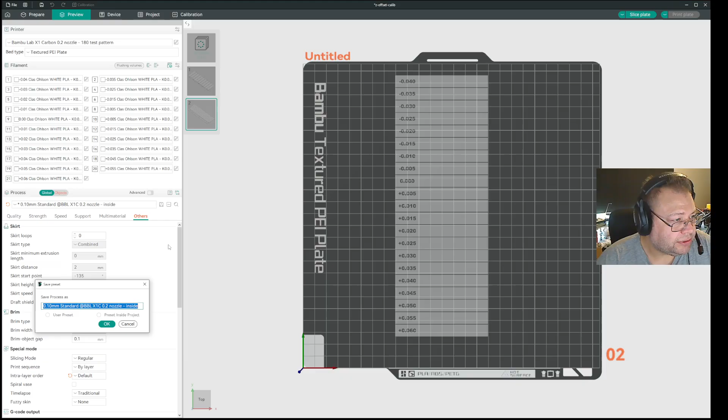So at the bottom of your Orca Slicer you can see the print sequence on the first layer, because in the global settings, others, it is set to by layer, not by object, because if you set it to by object you cannot fit all this in one plate. So set this to by layer, because you want to print all of them in the same layer first.

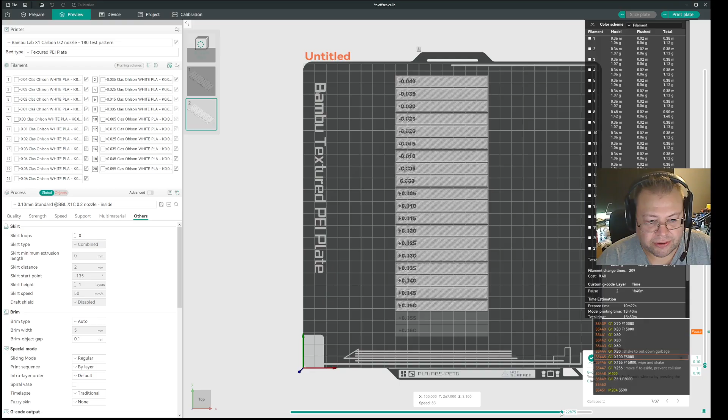Okay, and then you go to slice it, and you will see the sequence that you have. Okay, and at the bottom here, as I said, you have a bar you probably haven't used so much, but this one basically shows how it draws all the objects in sequence.

So it starts with 0, and then you can see, if I tilt this sideways, you will actually see an impression of a print head that prints it, and then you can see it starts to print downwards. So this is basically the sequence that it's printing in currently. But as you can see at the start there, it didn't start with the top. So I'm going to show you how to do that. Okay.

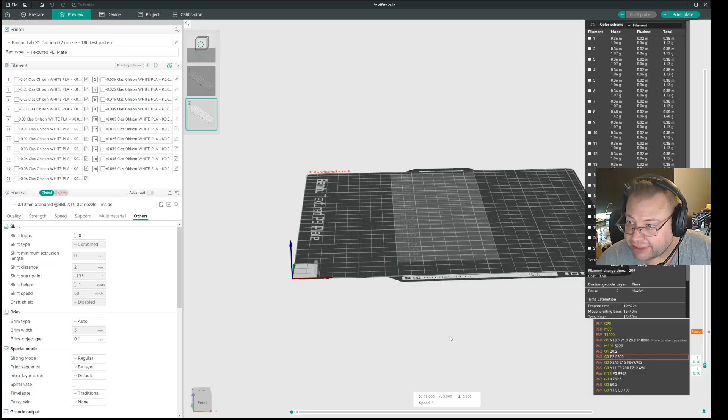By default now, every one of these also has the same order that I have put these in here. So all the filaments here, filament 1, filament 2, filament 3, filament 4, filament 5, filament 6, that equals the order I want to print with. Now that may not be the case for you. That is why you have to change the order. Okay. So first step, select all the filaments you need.

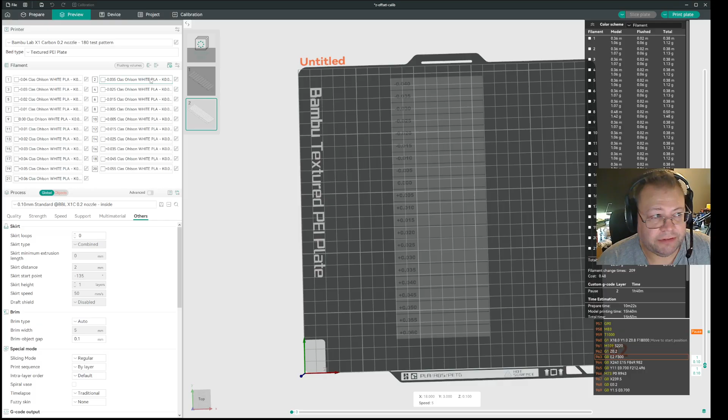And if you want to control the order sort of partially, make sure those filaments are selected in order in this list. That's what I have done here. If it's not in order in that list, you have to manually put it in order later. I'll show you how.

Okay, so let's say you did that like me. You put all these in an order. But even though this 005 is in order in my list, it is listed as number 8 here. It prints first. I don't want that. So I want to put that first, okay? So you start by going to the global menu down here to others.

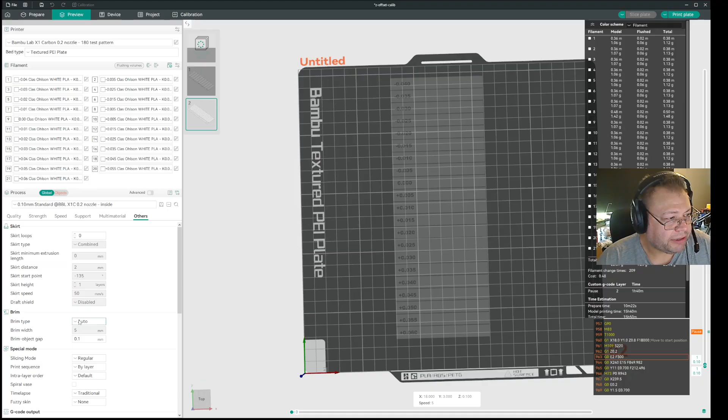And in my case, I don't want brim. No brim. And then forget that. But you go in the others and then you go down to special mode. This is Orca Slicer, remember. It could be different in Studio. And then you go to by layer. You leave that there because you want to print by layer to have all the objects in one setting.

But you have in Orca Slicer something called intra-layer order. And if you hold your mouse over, it says print order within a single layer. Okay? And when you click this, you have as object list. Now you would think that you can go into object here and select the different order here. But that doesn't matter. That's not what it does. So basically you go in global and you select as object list.

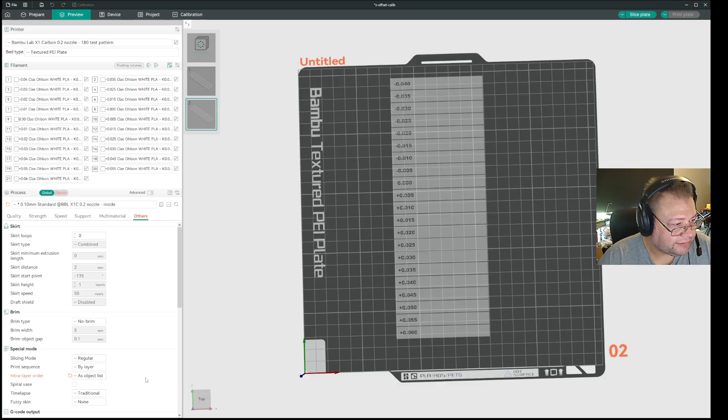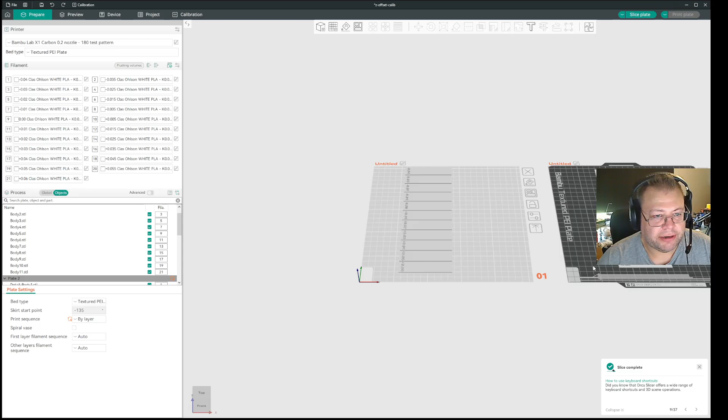And then you leave that as object list. And then you click on objects. And you select the build plate. I have 2 build plates in my overview here. I have one there and I have one there. I'm going to change this one. And then you go down and you select, okay, I want to click on build plate 2 because I want these settings to count for the whole build plate.

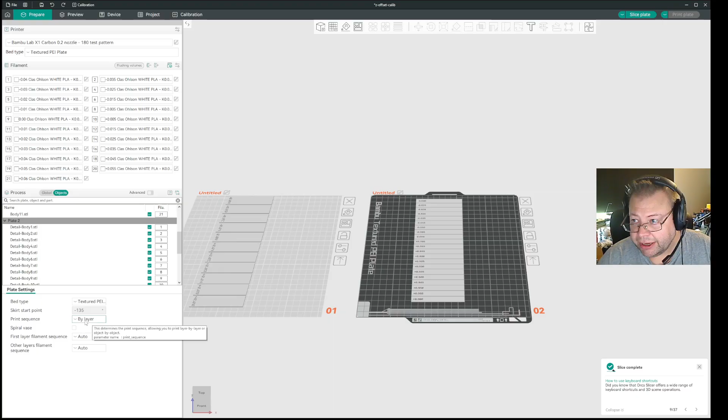Okay. So select the build plate. Not an object, select the build plate. Then under build plate it will show by layer. Okay, make sure that is correct for that build plate. And then under here you have something called first layer filament sequence, and it is automatically set to auto by default. So click that one and select customize.

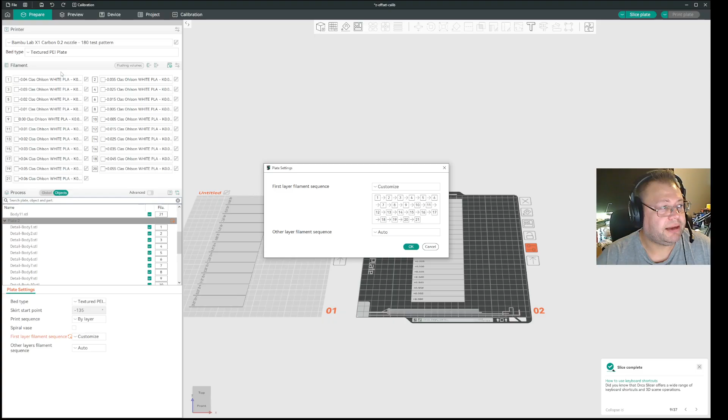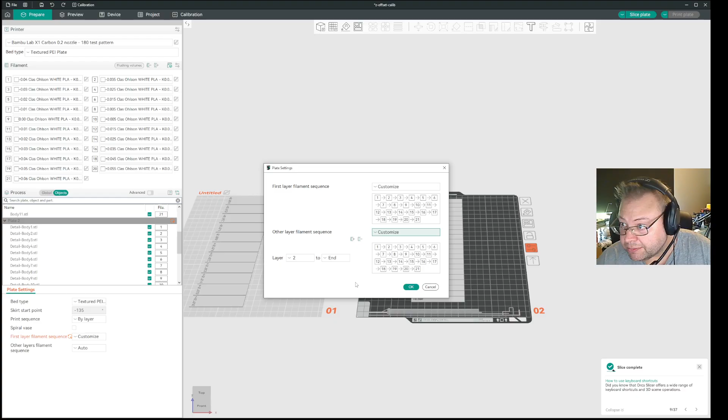Now on my screen, you can actually see that it keeps the same order of print that shows here. Okay, and the first part here is for the very first layer. The second part here is for every other layer. So you can go and you can select customize for that too, or you can select it down here. But if you select customize here as well, which I recommend, always print the same layer at the same thingy, then you can see that it gives another list here.

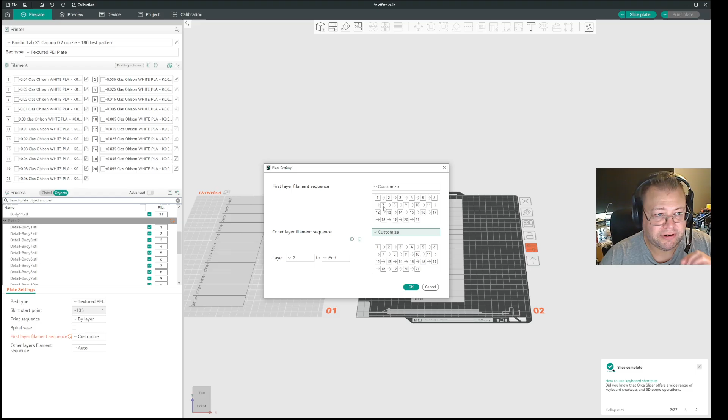Now here comes the fun part. If I select OK now, it will have fixed my problem with the one that didn't print correctly, because now it will be forced to print filament 1, filament 2, filament 3, filament 4, filament 5, 6, 7, 8, and so on. Okay? Which means that it will be forced to print first this, then this, then this, then this, instead of printing this first and then start on the top. Okay?

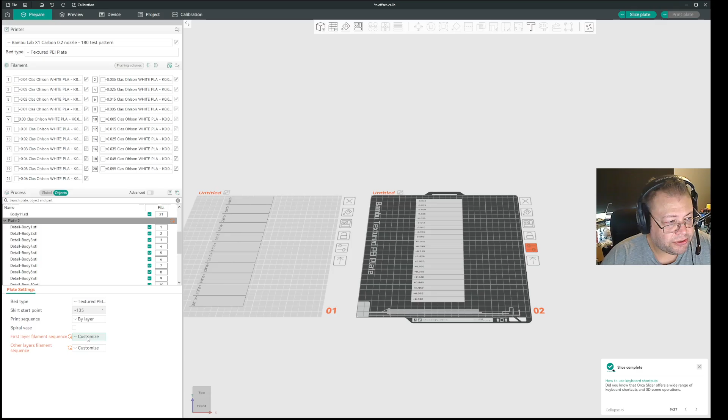You can change that order. Let me first show you that now. You bring it in, and it says customized here at the side now, and then you slice it again. And you will see that when I now bring this to the bottom and I start to scroll it, it will start from the top. So for me, that is the correct order I want it to print as. Okay? And then you get to the end.

But let's say you want to decide yourself which order you want to have. So you click here and select customize again. That brings up the window.

And then let's say I want to print that one first. And then I want to print this one. You left click, you hold and you drag. And then you want to print this one there. And number 18 I want as number 6. So for the first layer now it is selecting that order, and then I press OK.

Then you slice it. Very important. You have to sort of save it by slicing it. Now I have sliced it again. You already probably could see it. So now it's following the order I decided that it should print by the first layer. And then it continues with the original as it had it. You understand that?

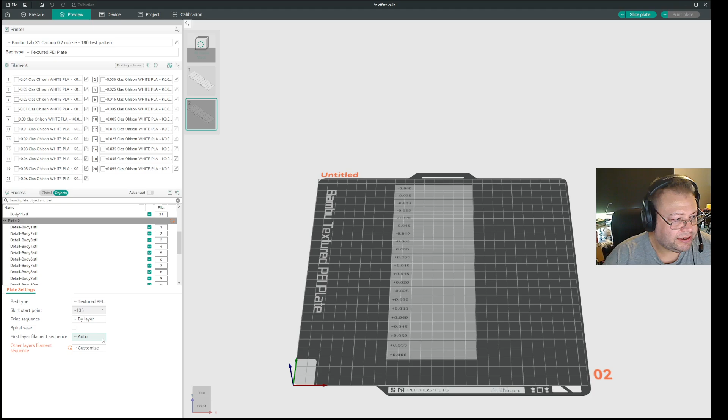I once saw a guide that said, oh, you can delete them in order and then bring them back in order. That's not how you do it. This gives you more control and is very, very detailed on how you do it. So how can I get back everything I did before? Select auto, go to customize, and the one I set before here has reverted back to its original setting, because it always takes the default order of filaments you have here and suggests that as your default order.

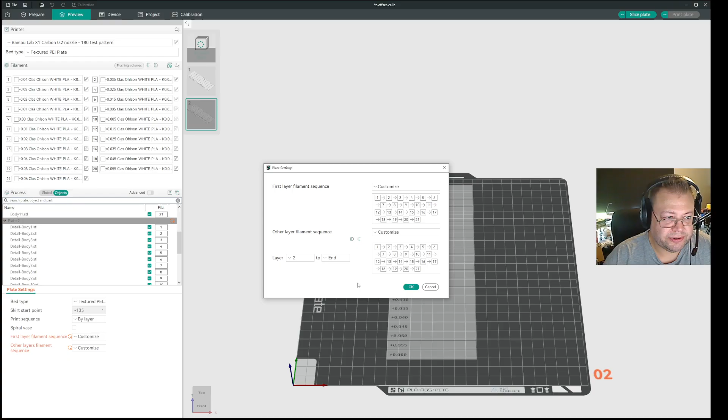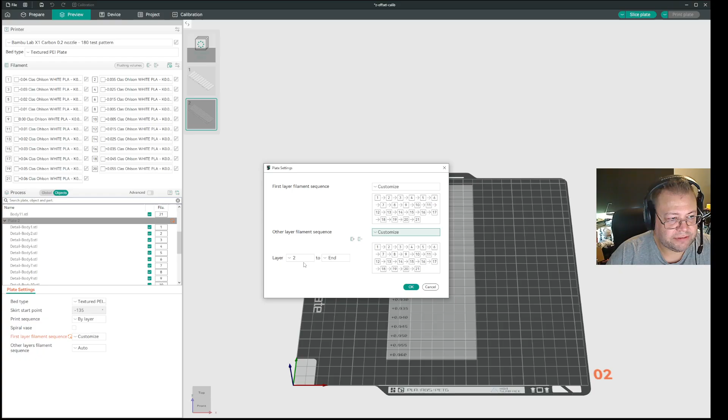So for me now, you can actually say here, oh, I want to start by layer customize, layer 5 for instance. From layer 5 I want to print like this. And yes, so I go back to auto, and then I select OK, customize, and by default now this has the correct order and this has now the correct order, because from layer 2 and onwards I wanted to print like that as well. Slice it.

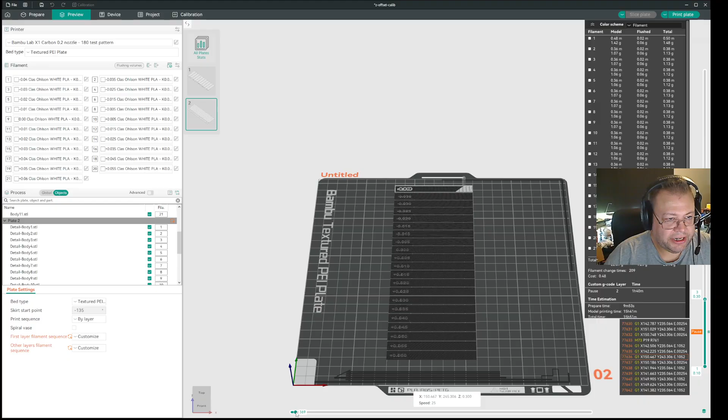And then you can see that I now have the exact order in which I want to print this. And for all the other layers, I'm just jumping over layer 2 because I have a pause there. For all the other layers, it will show exactly the same order.

So I hope that showed you really well how you can change the order of how to print each object on your build plate. Now there may be a problem here. If you're printing as parts, that's when you have a list of parts listed under one object. So you can import as object and split the part, and then you will get one main object, and then you have a lot of sub objects under it.

I haven't tested how it will be to print like that, but you can test yourself. May work, may not. For me, print by object is the way to go on this. And it also lets me go in and say, okay, I don't want to run these because I know they will not print. So I can just go in, and since I'm selecting my object, I can unselect those.

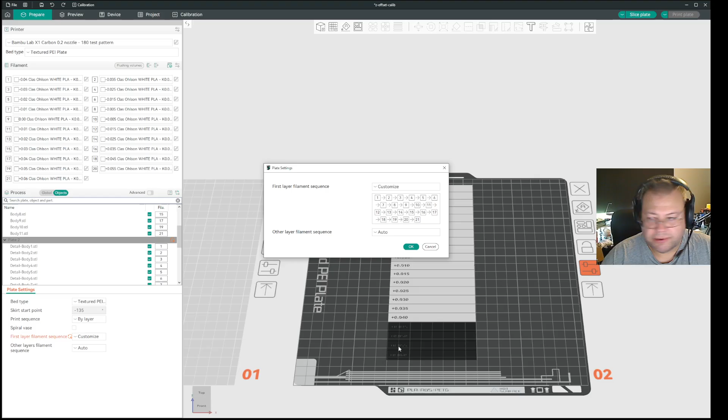And when I then select OK, go back, select build plate, and select customize auto, you will see it lists 21, but it will not print the other ones here because the print is disabled. So like that. OK, and then we'll go back and we'll save it.

And that concludes my video for today.